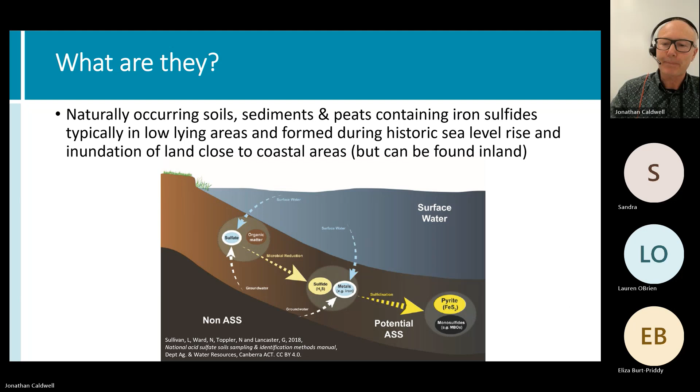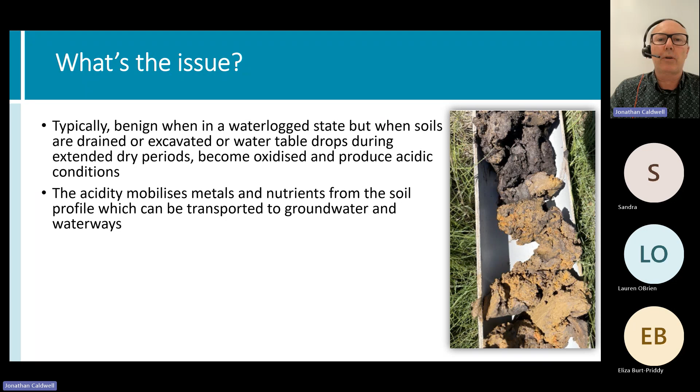So what is actually the issue with these acid sulfate soils? They're typically fine when in a waterlogged state, but it's when those soils are drained or excavated or the groundwater table drops during extended drought periods that they can become exposed to the air and oxidized. And it's then they generate sulfuric acid and produce acidic conditions in the environment. That acidity can mobilize naturally occurring metals and nutrients in the soil profile, which can then be transported through to groundwater and waterways.

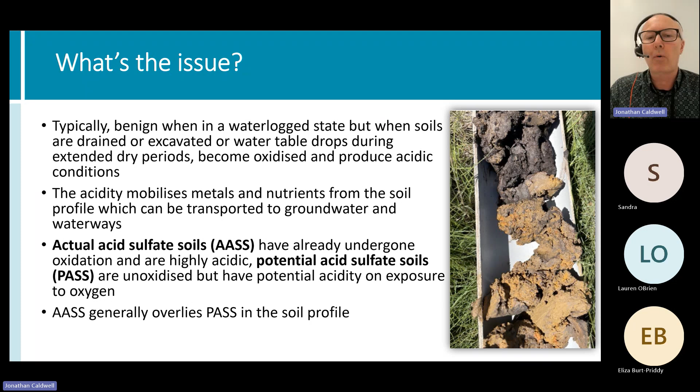Acid sulfate soils are classed into two types depending on whether they've undergone oxidation or not. The actual acid sulfate soils are the ones that have already been exposed to oxygen and are highly acidic. Then you have the potential acid sulfate soils that have not yet been exposed and have not produced acidity, but have the potential to do so on exposure to oxygen. Typically the actual acid sulfate soils will be found higher in the soil profile, with the potential acid sulfate soils below them.

So there are a number of issues and concerns around acid sulfate soils. They can have a lot of effects on both infrastructure and the environment, including aquatic and terrestrial environments. They release a lot of metals such as aluminium, iron, copper, zinc, etc. A lot of nutrients such as phosphates and nitrates can be released into waterways and result in toxic algal blooms, also resulting in deoxygenation of the water bodies.

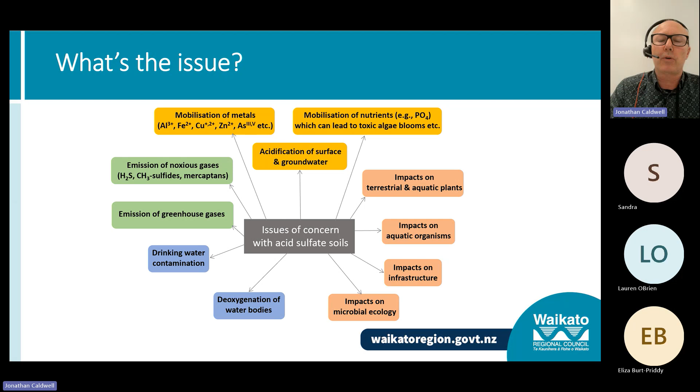If groundwater is being used for potable sources, that can pose a risk of drinking water contamination. They have been known to release noxious gases such as hydrogen sulfide when disturbed. You can have emission of greenhouse gases. So there's a range of issues of concern when we're looking at acid sulfate soils.

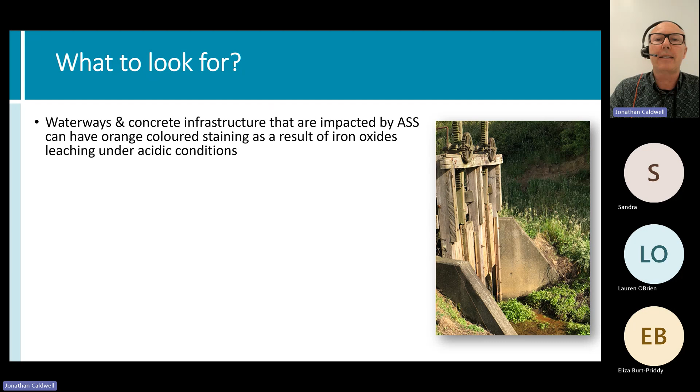Some of the things to look for in waterways and concrete infrastructure impacted by acid sulfate soils: they can have an orange-coloured staining as a result of iron oxides leaching out. Naturally occurring aluminium can be released in large amounts into waterways, which can result in usually quite turbid waterways suddenly turning very clear or milky blue-green over quite a short period of time, sometimes overnight, due to the natural flocculating properties of some of these compounds.

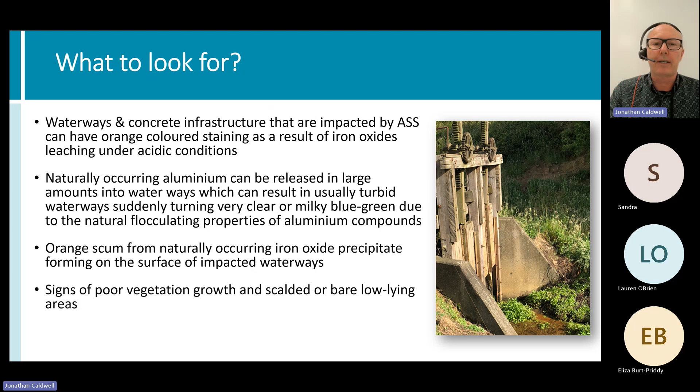Orange scums associated with iron oxide precipitate can also form on waterways. Signs of poor vegetation growth can also be an indicator that acid sulfate soils are present. And release of sulfurous odours associated with hydrogen sulfides can also indicate the presence of acid sulfates.

In the field, there can be some field testing that you can undertake to identify potential presence of those soils. A pH test of soils identifying pHs of less than or equal to 5 can indicate highly acidic soils. Below 4, it's an indicator that you may have actual acid sulfate soils.

And if you treat those soils with a 30% hydrogen peroxide solution and retest the pH, and if the pH drops below 3, this is an indicator you may have potential acid sulfate soils. Or if the pH of the soil before and after oxidation is more than a 2 pH unit shift downwards, this is also an indicator that you've got potential acid sulfate soils. But you will need to follow up that confirmation using lab-based analyses such as the chromium reducible sulfur analysis.

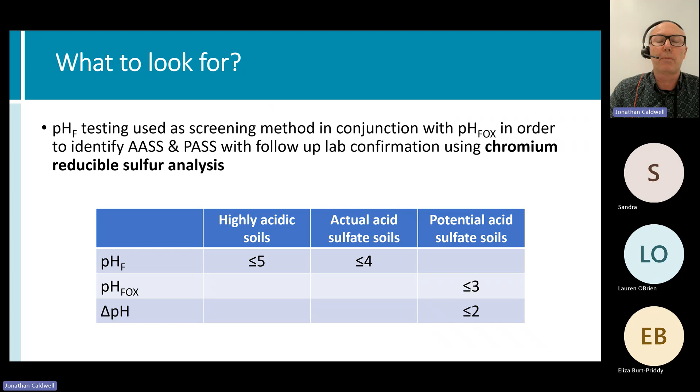So where are they? They are well recognised as a problem around the world, including Australia and the UK, where they have well-established policy and regulation for managing and controlling the effects and protecting infrastructure. Likewise, Sweden, Finland, low-lying areas like the Netherlands have also investigated and established policy and regulation around acid sulfate soils and have mapped them.

The presence of acid sulfate soils in the northern parts of New Zealand has been known about since the 1970s, but it's only more recently that they've been investigated, typically in association with quite large infrastructure projects. More notably, as many of you may well be aware, the Northland Ruakaka failed development, the Marsden City development, where the stormwater infrastructure failed very early on in the subdivision development due to exposure to acid sulfate soils.

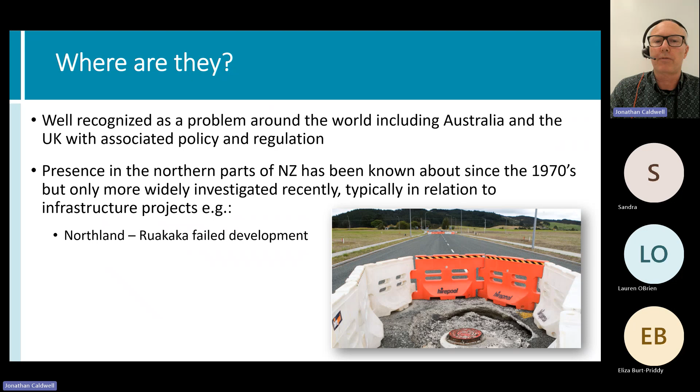In the Auckland region, there was the Puhoi to Warkworth motorway, which included some significant investigations of acid sulfate soils along that route. And there's been ongoing development at Auckland Airport, which has identified acid sulfate soils around that area. As well as more recently, the Wellsford wastewater treatment plant upgrade, which has identified the presence of acid sulfate soils.

In Waikato, we have had some recent upgrades to some of our pump stations that have involved acid sulfate soil investigations. There is also a proposed solar farm project in Whitianga, which has identified the presence of acid sulfate soils. Whanganui, there was a proposed three waters stormwater project that involved investigation of acid sulfate soils, and even as far south as Dunedin, where some pipeline upgrades resulted in the requirement for acid sulfate investigations.

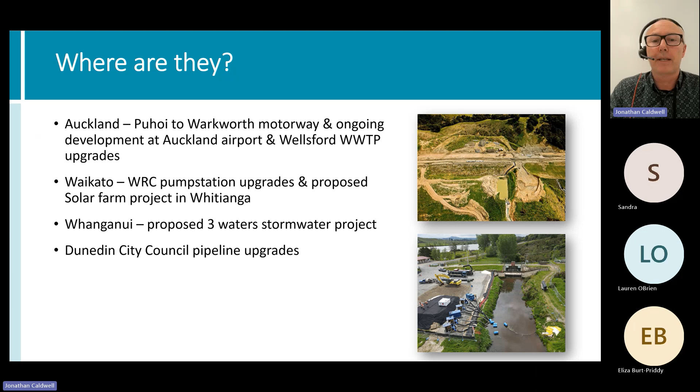In Auckland in 2016, the Auckland Council had an acid sulfate soil map developed for them by GHD. The map here shows areas of high, medium, low and negligible probability of occurrence. And this is really probably the first example of a region-wide acid sulfate soil mapping exercise in New Zealand.

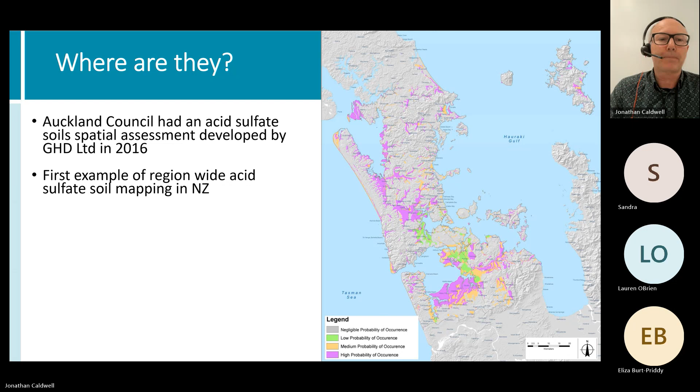In the Waikato, we've had some awareness of issues for about 15 years, where we've identified regular fish kill events in the Aka Aka/Otaua drainage area, which is to the northern end of our region, since 2007. So the Aka Aka drainage area is on the northern banks of the Waikato River, just before it discharges to the sea, just close to the border with Auckland. And a series of events triggered an investigation in 2020 to try and establish really what was happening here.

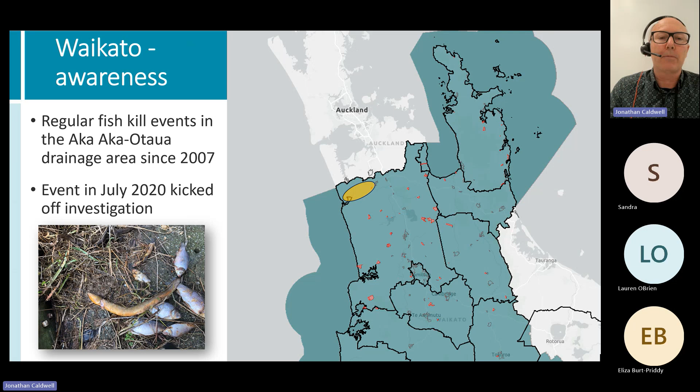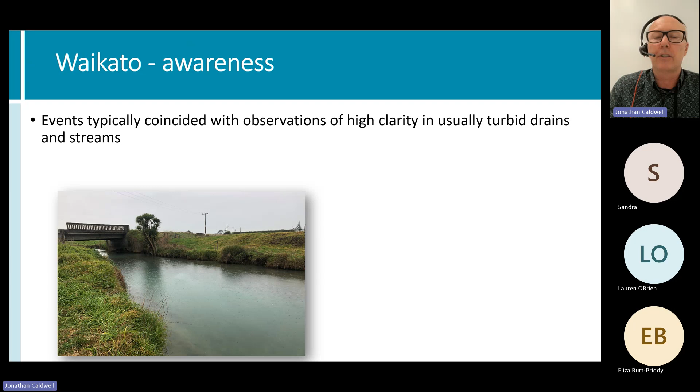We found that these fish kill events were typically coinciding with observations of high clarity in what are usually quite turbid drains or streams, and we had a really useful landowner farmer who was very observant and would often take photos for us, and remarked that the river or stream adjacent to his land had gone clear overnight. Sometimes iron floc was also observed.

An intensive pH monitoring exercise was undertaken in about 6 or 7 drains around this drainage area between 2014 and 2016, and it was found that over wintertime the pH often dropped below 6 pH units, certainly well below the ANZ guideline protective range. Also associated with changes in water clarity, sulfate to chloride ratios were increasing above 0.5 during winter, which is also an indicator of the presence of acid sulfate soils.

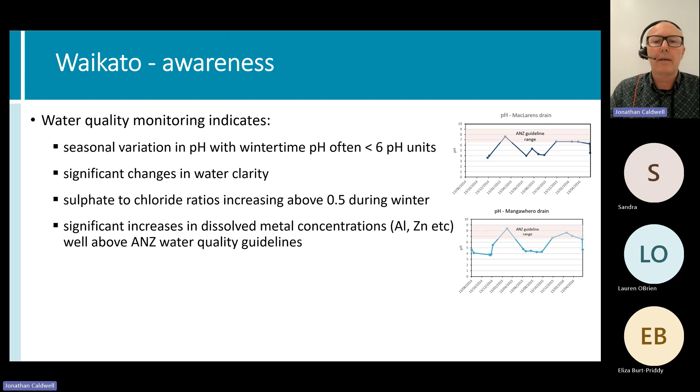And there were some significant increases in dissolved metal concentrations, namely aluminium, zinc, copper, etc., which were well above 95% and in some cases well above 80% protection values. So adverse conditions were found to be occurring for up to at least 3 months per year over that wintertime period. And these conditions were generally aligned with years where we had very low rainfall, so drought conditions typically over the summer period, followed by quite high rainfall events in the autumn and winter, which were likely flushing through the acidity that had formed over those drought conditions.

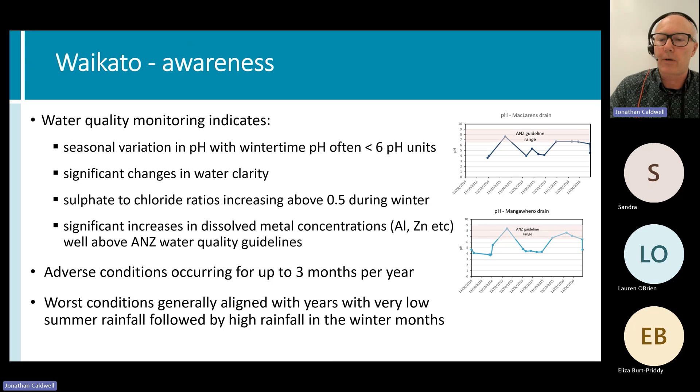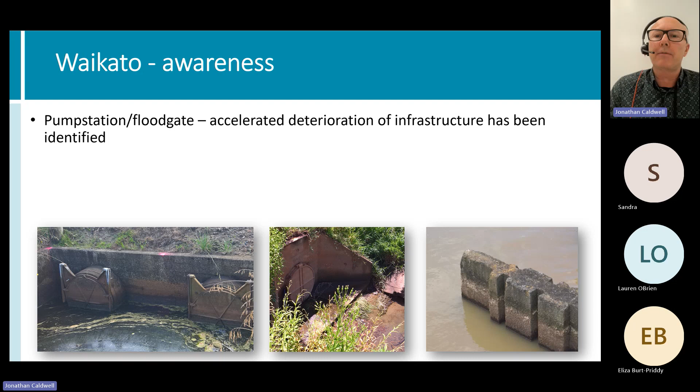Also, our catchment management service staff had been identifying some unexplained accelerated deterioration of infrastructure for some of our pump station and floodgate assets. And so all of this coupled together provided some strong indicators that water quality was being impacted seasonally by the presence of acid sulfate soils due to those fluctuating groundwater levels.

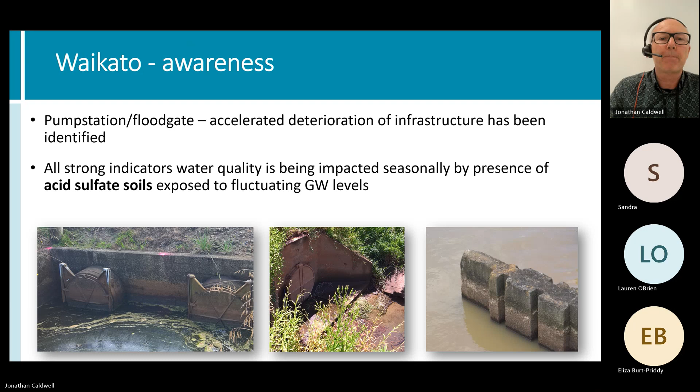So following this, we had some pump station upgrades, namely the Mangawhero pump station in the Aka Aka area to the far north of our region, and the Churchill pump station in Rangiriri. And both of these upgrades involved geotech testing, which had some acid sulfate soil investigations undertaken at the same time, which identified their presence.

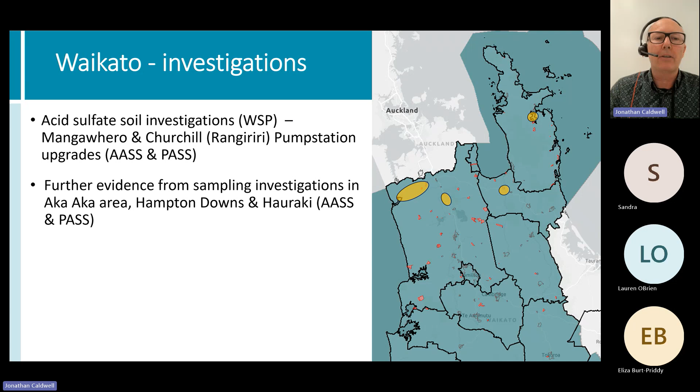Some further evidence has been obtained from a wider investigation of soils across the Aka Aka area and in Hauraki around some of the pump stations. And there was also knowledge of an acid sulfate soil investigation undertaken in 2007 as part of the Hampton Downs landfill development. And more recently, there is the solar farm proposal for Whitianga, where acid sulfate soils have also been identified in the location where excavations will occur.

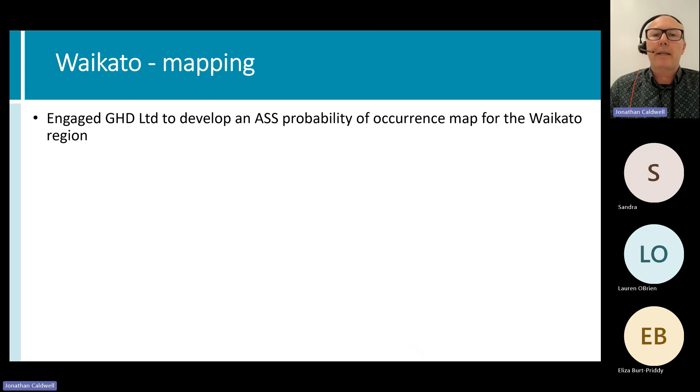So over the last year, we've engaged GHD to develop an acid sulfate soil probability of occurrence map for the region. It's based on several inputs, including GNS's geological database, soil types, soil classifications, texture and order, and elevation, wetland layers, and land cover databases. All of that data used to inform acid sulfate soil probability of occurrence. So the intersection of the worst risk factors for acid sulfate soils produces outputs that are weighted to provide negligible, low, moderate, and high probability of occurrence.

The map was then refined based on soil sampling at 100 locations across the region to a depth of 2 metres. So this ground truthing provided more accurate predictions and refinement of that map. The map and methodology was reviewed by Manaaki Whenua Landcare Research. There have been some recommendations around further refinements that can be done to improve the accuracy of the mapping. One of these is looking at more accurate elevation data, which we can now obtain from a regional LiDAR data set, which has now become available, which wasn't available at the time.

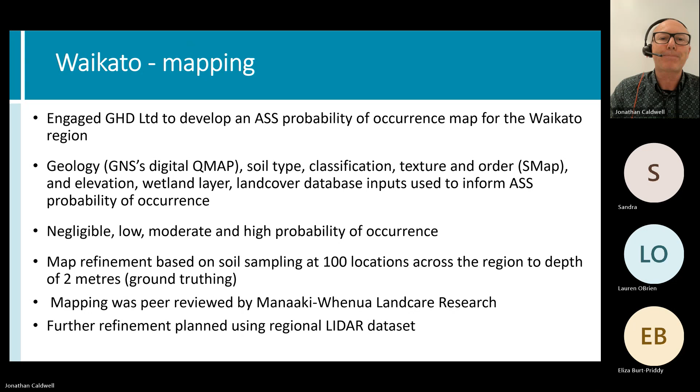So here we have the map indicating high, moderate, low and negligible probability. So the high probability areas are mainly in the Waikato and Hauraki basins. There is also a report produced by GHD which discusses the methodology, the results of the mapping outcomes and the results of the soil sampling, ground truthing.

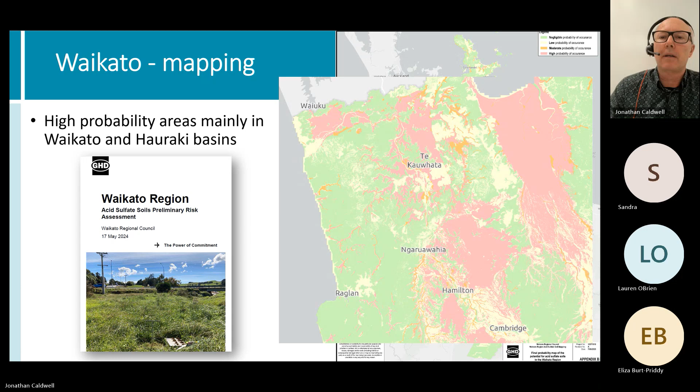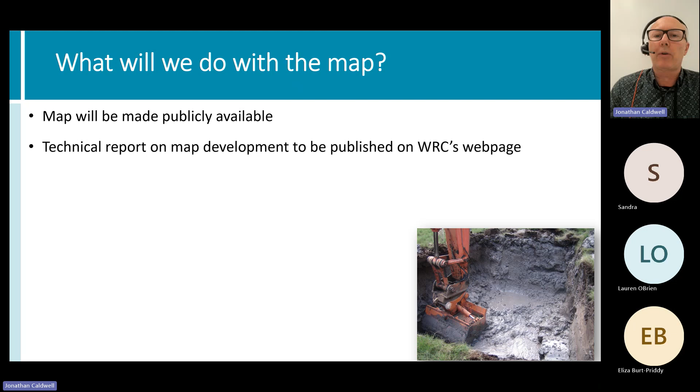So our intention is to make the map publicly available along with the technical report, which is just going through our publication process at this stage. We will obviously be making the geospatial mapping layer available at that time. So probably in the next few weeks, we're looking at that becoming available.

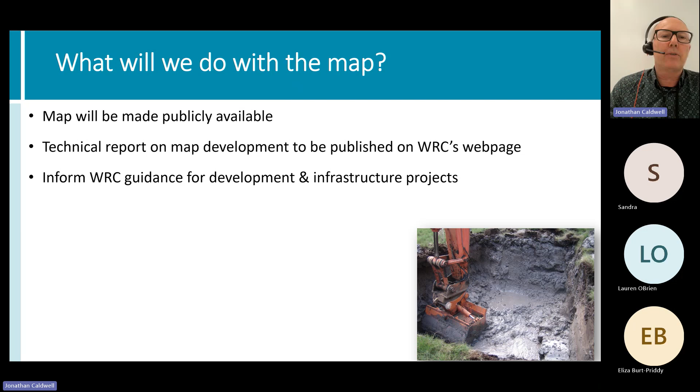We intend to use the mapping to inform Regional Council guidance for development and infrastructure projects, to support maintenance work on controlled assets such as our pump station, floodgate and drainage management. And we'll also look at using it to help inform and develop policy and regulation for minimising environmental impacts during earthwork projects, and also for protecting infrastructure from harm. We will look at some further refinement of the mapping though before we develop policy and regulation.

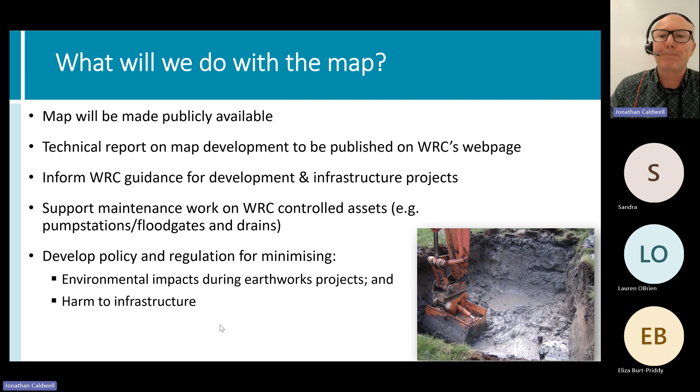So looking at what existing regulation and guidance is out there in New Zealand, we obviously have Regional Council's RMA functions under Section 30 along with enforcement roles under Section 15 that are relevant to managing and controlling the effects of acid sulfate soils. Territorial authorities have their RMA functions around land use, natural hazards and subdivision under Section 31, Section 106 and Section 244C, and also the Building Act, which relate more to infrastructure. But we are currently lacking specific national, regional or district policy, regulation and guidance.

Apart from a few examples, we have, resulting from the failed Marsden City development, Opus, who worked with Whangarei District Council to do some mapping and produce some guidance or a policy guide around protecting infrastructure during new building developments in those higher risk areas. I gather that they have been looking at this in more detail recently with their Plan Change 1 review, which may be looking at introducing some rules under their natural hazards chapter.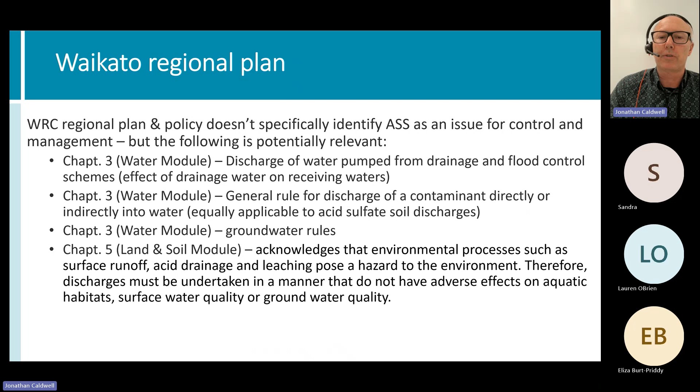We have our groundwater rules under this water module as well, which is relevant to any activities that will take groundwater or dewatering projects where groundwater depth is going to be impacted. Chapter 5, we have our land and soil module, which acknowledges that environmental processes such as surface runoff, acid drainage and leaching pose a hazard to the environment. Therefore, discharges must be undertaken in a manner that do not have adverse effects on aquatic habitats, surface water quality or groundwater quality. So this chapter has some clear indicators that we need to be managing the effects of acid sulfate soils during earthworks projects.

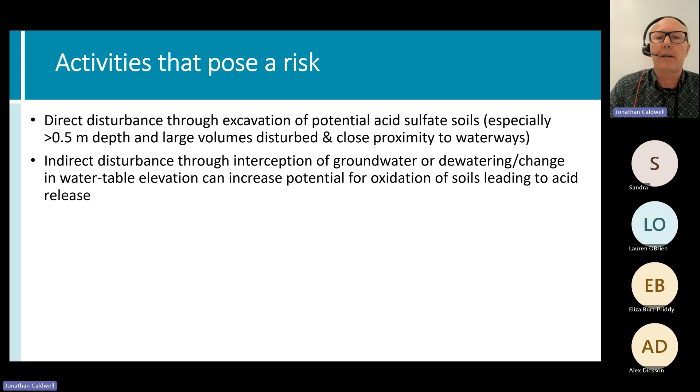So just moving on to some of the activities that pose the greatest risk when we're looking at managing acid sulfate soil disturbance. Obviously, direct disturbance through excavation poses the greatest risk, especially when you're excavating greater than 0.5 metre depth, you're excavating large volumes and you're excavating close to waterways. There's also the indirect disturbance through interception of groundwater or dewatering, where you are changing the water table elevation, and this can increase that potential risk for oxidation of acid sulfate soils.

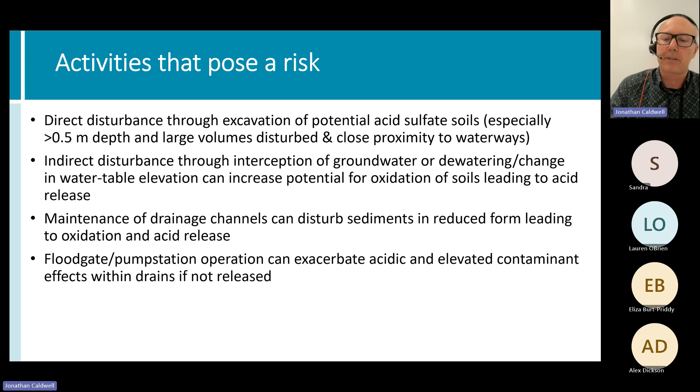Likewise, maintenance of drainage channels can disturb sediments where you have sulfides present, and this can result in oxidation of those sulfides and lead to acid release. Floodgate pump station operation can also exacerbate acidic and elevated contaminant effects within drains if not released and flushed. And that's really one of the reasons why we think we've seen some of those fish kill events where some of the drainage channels haven't been flushed out and there's been an accumulation of acidity and heavy metals in those waterways and drains.

So we're looking at developing preliminary guidance. Really what we're looking at is if geotechnical or other soil investigations are required and there is a suspicion that acid sulfate soils may be present, then you should consider some concurrent investigation for acid sulfate soils. If the presence is confirmed, then you should develop an acid sulfate soil management plan and implement it in consultation with the Regional Council to effectively anticipate and manage the potential impacts of those activities. And there are a number of guidelines available already through Australia: the Queensland guidelines, the Western Australia guidelines and the national guidelines.

So the Queensland guideline provides some specific action criteria for managing the disturbance of acid sulfate soils, and these are based on a calculation of the net acidity. So the net acidity is the sum of potential sulfidic acidity plus actual acidity and retained acidity minus the acid neutralizing capacity. So you need to take into account all of these factors when calculating net acidity. Taking into account the neutralizing capacity is important because there may be some buffering capacity from naturally occurring carbonates in the soils, which can reduce that overall net acidity. And the recommended lab analysis for this is the chromium reducible sulfur suite, which is currently only provided by Australian labs.

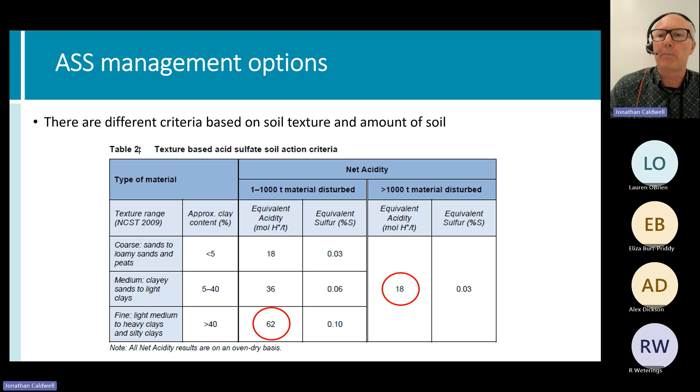Therefore, you may be able to allow a higher action criteria before you would be required to start looking at developing an acid sulfate soil management plan. So based on exceedances of those criteria, you would want to develop an acid sulfate soil management plan for handling the treatment and disposal of those soils if disturbance is unavoidable.

However, the following hierarchy of options should always be considered. Can you avoid disturbing those acid sulfate soils in the first place? If you do need to disturb them, can you minimise that disturbance? There are a lot of construction techniques that could be employed to reduce the amount of soil you actually have to excavate and bring to the surface.

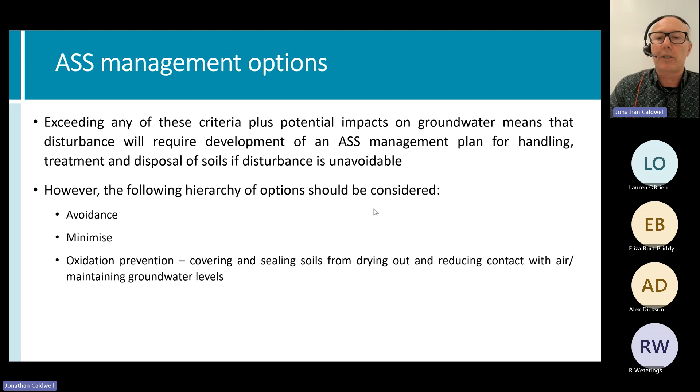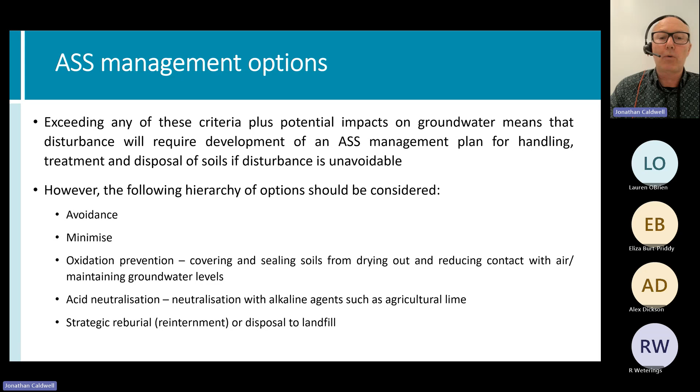Can you reduce the amount of oxidation when you bring those soils to the surface? Can you cover them, seal them up, prevent them from drying out and reducing their contact with air? Or can you maintain groundwater levels while you are undertaking those excavations? You may need to neutralise those soils by mixing them with alkaline agents such as agricultural lime, or you may need to rebury those soils at a depth below the groundwater table or dispose of them to landfill.

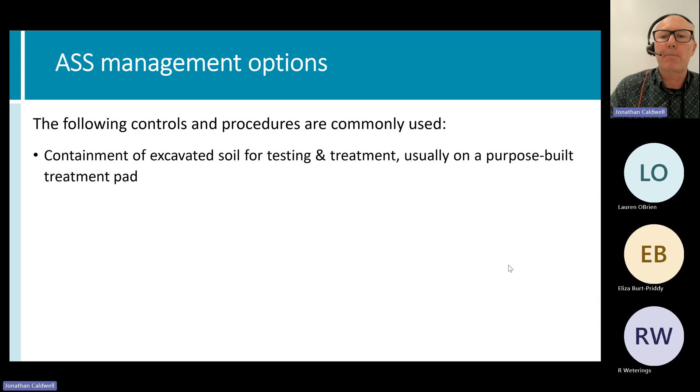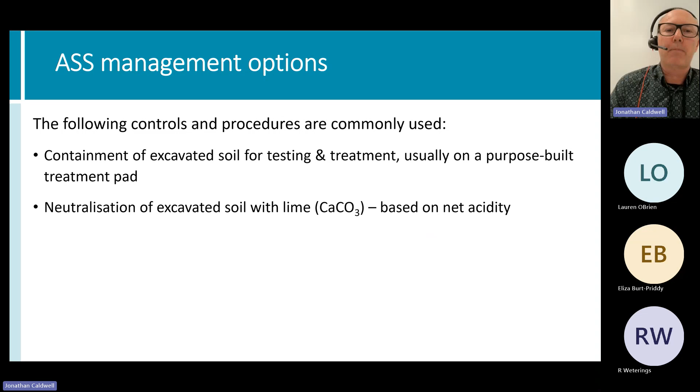So the following controls and procedures are commonly used. You have containment of excavated soil for testing and treatment, and this is usually where you design a low permeability pad, possibly on clay, and you can then mix your soils to neutralise them with calcium carbonate, and typically you're required to take the net acidity and multiply that by 1.5 times to ensure that all soils are neutralised.

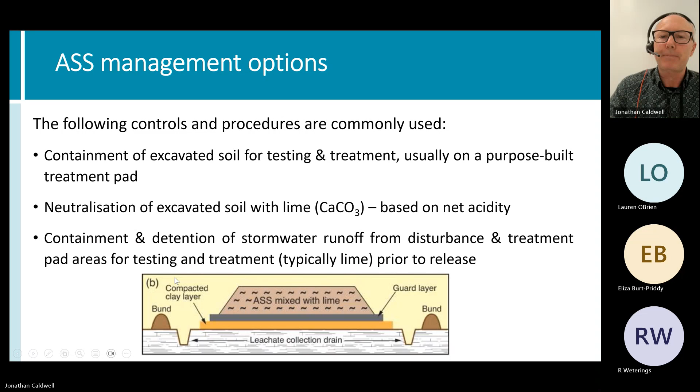And then you have the option of handling and disposing via reburial or off-site disposal. You may need to treat that soil before reburying it below the groundwater table. You may also need to treat that soil with lime before disposing it off-site. Some sites may require that.

There is a managed fill site that's recently been authorised in the Waikato region, operated by Gleason's near Huntly, and they will be able to take untreated acid sulfate soils because they are developing an acid sulfate soil treatment facility at that location.

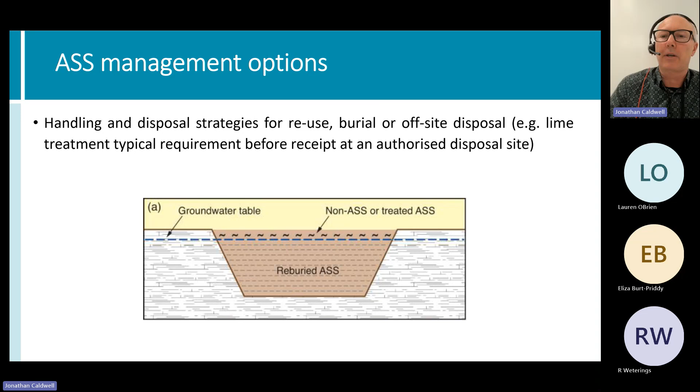Now, when considering catchment management options, which are all really more going to be applicable to regional councils, there are some options that have been trialled in Australia: development of aerobic wetlands, which can filter out the acidic drainage water from those problem areas, but they do come at quite a high maintenance cost, and it does require some large areas of productive land to be retired, which can be controversial.

Permeable reactive barriers along waterways can also be implemented to treat the acidic groundwater and neutralise it before it gets to the streams and drains, and this can involve lining the base of drains with limestone or limestone barriers beside the drains, but they can be prohibitively expensive, especially when you're looking at a large catchment.

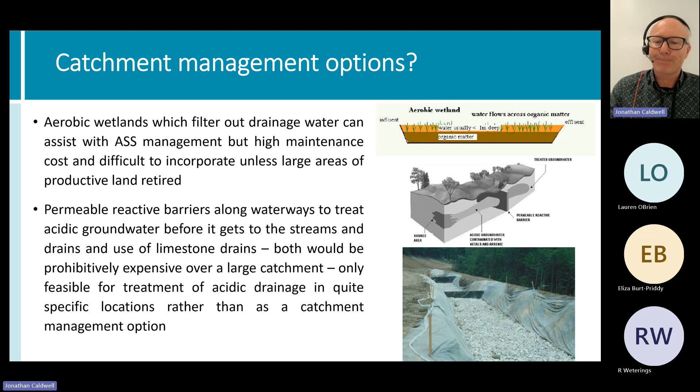And there is also wet acid containment, where you can reduce the rate of discharge from groundwater to the drains by raising the levels in drains using sills, drop boards, weirs, penstocks, or completely filling the drains and reinstating natural drainage lines.

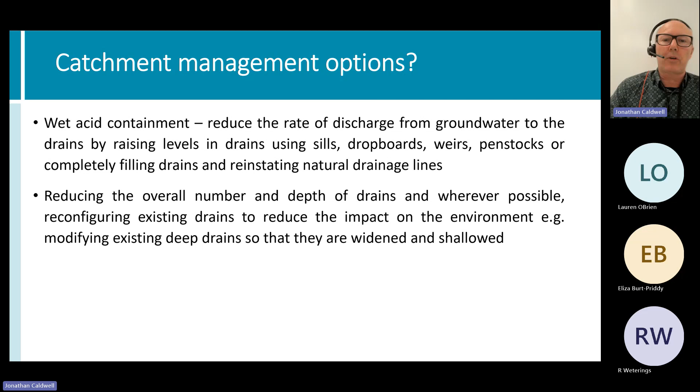Lastly, you can also look at reducing the overall number and depth of drains, and wherever possible reconfiguring them. So rather than having really deeply incised drains, you can make them wider and shallower. And you can also revert the land to wet pasture grazing, which is an option that has been looked at in Australia, but has met some resistance by farmers just due to the unknown production and quality from using those native wetlands.

So lastly, I just wanted to talk about a recent implementation of that acid sulfate soil map that we've had developed. Our water quality scientist, Dean, has been looking at overlaying the regional state of environment water quality monitoring sites over our high-risk areas, which are identified in orange here.

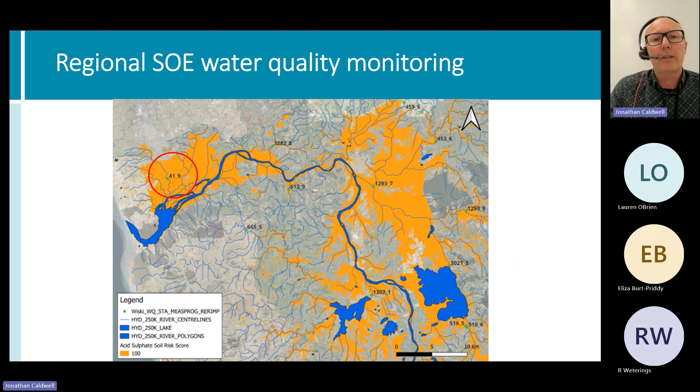And so the first water quality site he's looked at is the one identified by that red circle there. This is right in the middle of our Awaroa drainage area where we've had these fish kill events in the past.

So this site is then going to be complemented with an extended suite which will include alkalinity, chloride, sulfate, and dissolved metals, along with continuous monitoring of turbidity, pH, electrical conductivity, and depth sensors, which can be telemetred back to an online dashboard, which will display some real-time data and give us alerts when things are turning pear-shaped.

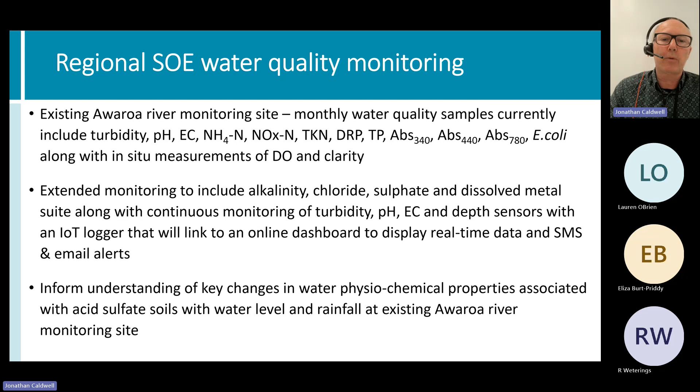So it will inform our understanding of what's actually happening, what impacts acid sulfate soils are having on these waterways in this area, especially when we've had some drastic changes in the groundwater table. So it will provide a proof of concept for expanding that dashboard and monitoring network for other high-risk acid sulfate soil sites around our region. Additionally, we're already looking at adding a suite of acid sulfate soil contaminant indicators to the monthly grab samples for other high-risk sites.

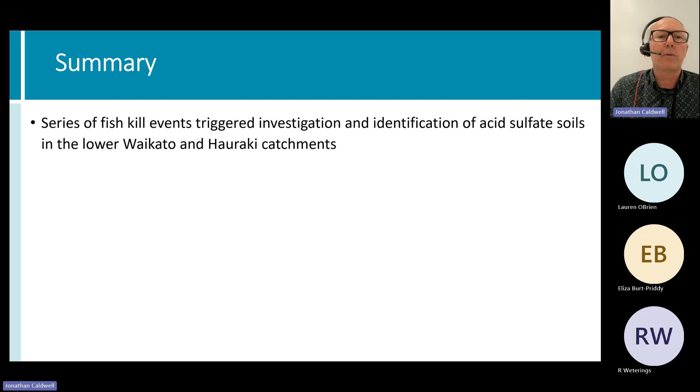So in summary, we've identified over the last 15 years a series of fish kill events that triggered our investigation and identification that acid sulfate soils were having some quite significant environmental effects in the lower Waikato and Hauraki catchments. And this really led us to develop a probability of occurrence map, or at least engage GHD to do that for us, which predicts high probability of occurrence mainly in the Waikato and Hauraki basins.

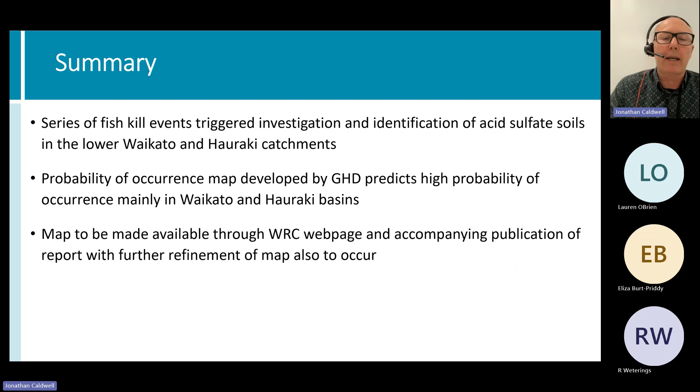We do note that we will need to look at some further refinement to really provide some more robustness to developing and informing policy plans and rules around this. But we are going to make the map available along with the report within probably the next few weeks. And as I said, this map will help inform future proactive policy and plan rules and guidance for avoiding or minimising harm to the environment and infrastructure due to the presence and disturbance of acid sulfate soils.

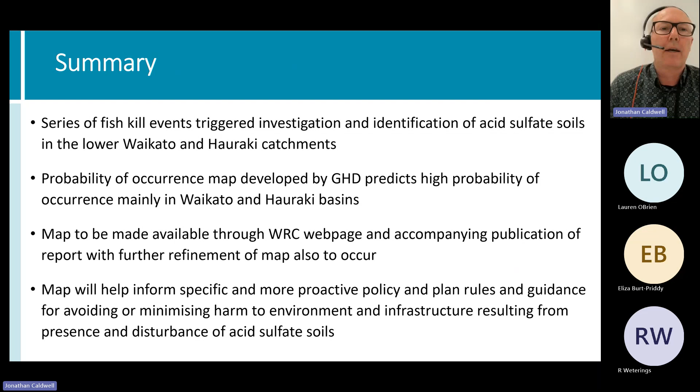So the first one we've got is, what criteria were used to classify the areas into high, medium, and low, and how was this weighted? Okay, so we've got a number of criteria. So obviously, soil type, geology, elevation, soil classification. There are a number of these criteria that were used to classify areas, and they were given a weighting depending on how many of those factors intersected.

Well, the report that's currently going through our publication process will be available very shortly. It details in quite a lot of detail how that was weighted. Cool. So when that report's out, hopefully we'll be able to share that around and answer those questions in more detail.